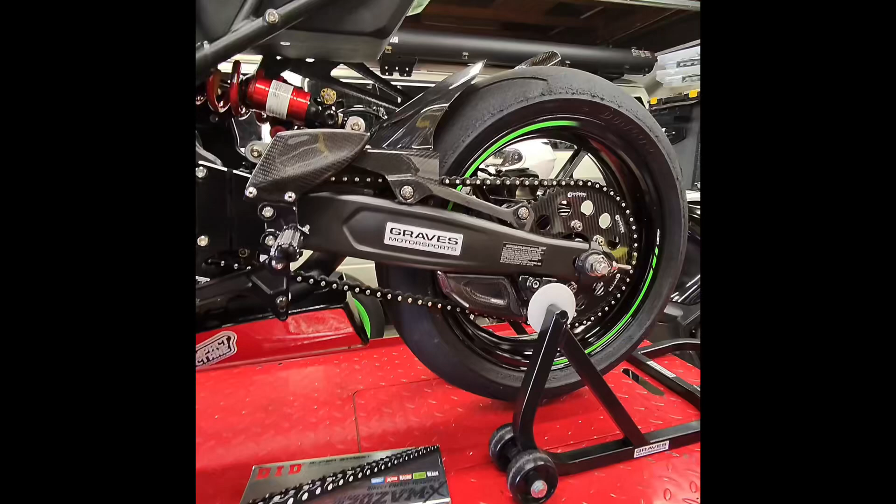I'm going to share my secrets today on chain maintenance for motorcycles. If you are interested in having an expensive chain that lasts a long time and keeps your bike clean, then this is the video for you.

Most folks I see have very dirty chains. They use some wax material that pretty much just attracts more dirt and rocks, and that's not the way. The chains that I use are nice DID, high quality chains, and they last about 20 to 25,000 miles using this method. So stay tuned.

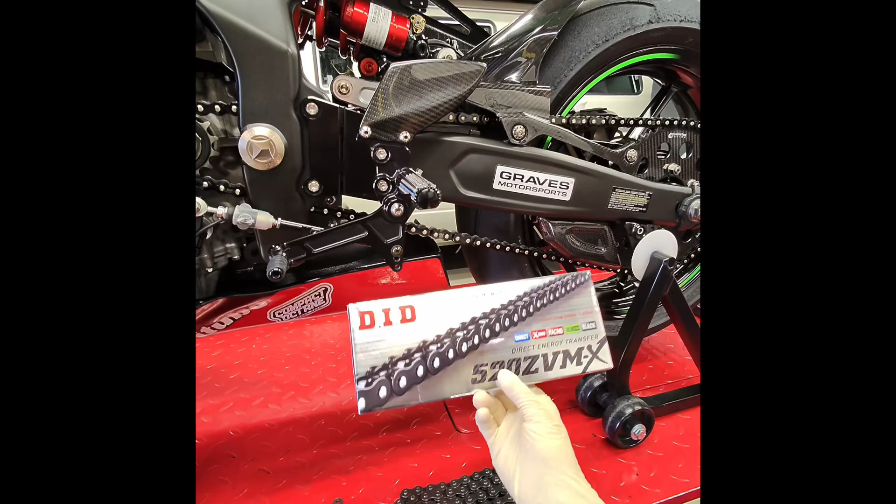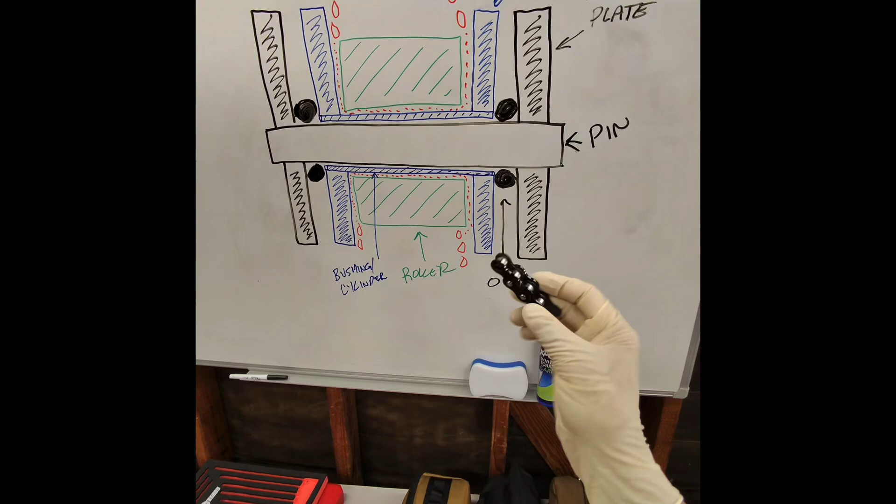First thing we need to do is understand how the chain works. So, we've all seen one. You think you know how it works. It bends, and you just throw some lube on it and that's it. But actually, there's more to the chain than you think.

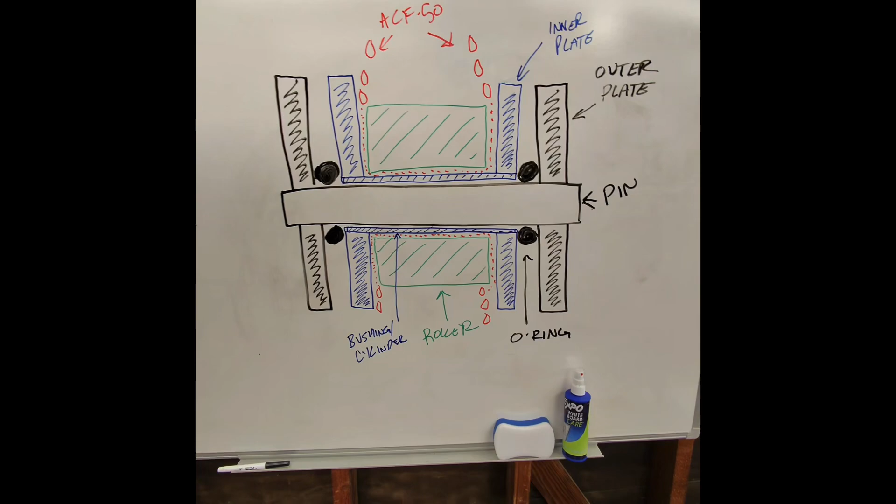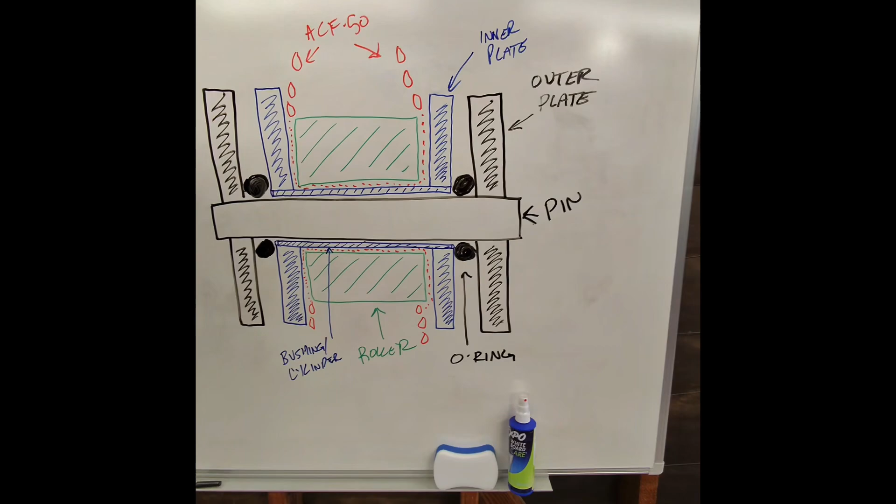There's actually 3 separate moving components in a chain, highlighted in the cross section that's not to scale here, in 3 different colors: black, blue, and green. The red is lubrication, and we'll talk a little bit more about that later. But first, let's go through the different components of the chain so you understand how it works.

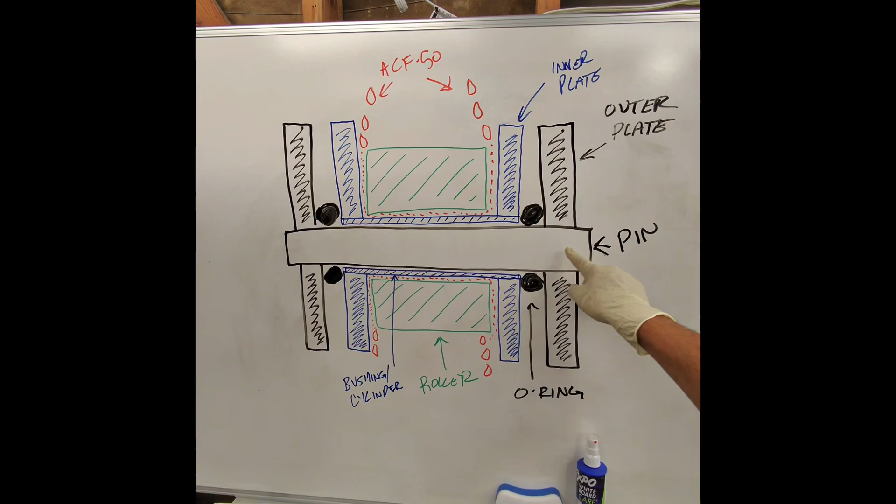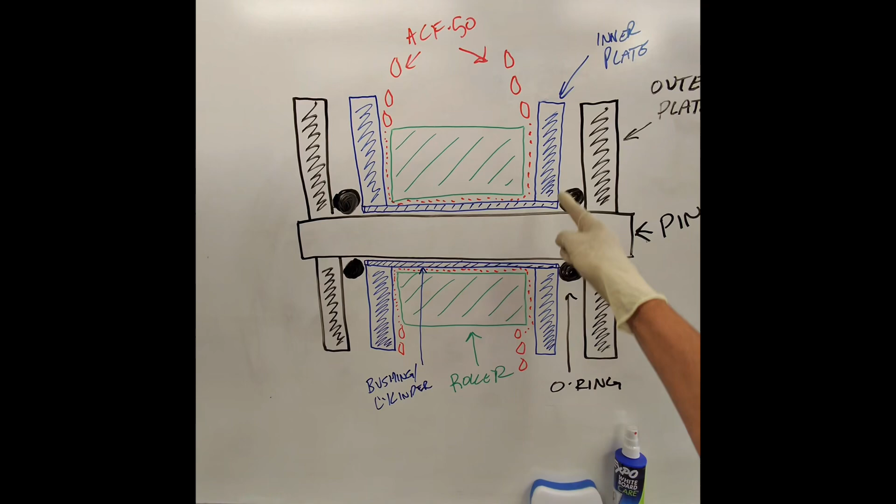Okay, first, let's start with the outer plate and the pin. This is what you see from the outside on the side-on view, right? This is all one unit. The outer plates and the pin are all pressed together and they move together. Then, on the inside of that, you've got inner plates, and those are held to each other with a little cylindrical bushing. So the outer plates and the inner plates slide and they rotate.

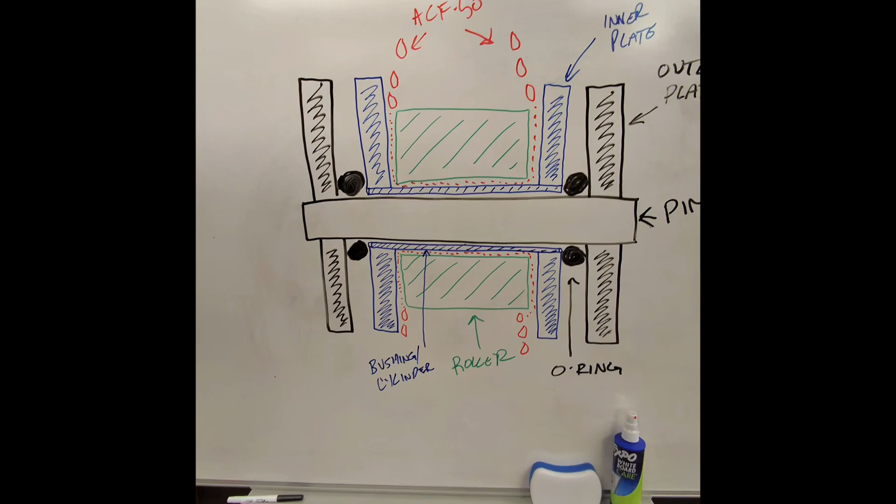The chain can bend, but they're not connected. They're separated by these O-rings, and inside the O-rings there is lubrication, which is permanent. You cannot add more lubrication in there. There's no way to spray something from the outside and get it in between this pin and the bushing or past these plates and the O-ring. That goose is cooked. So that's going to be really important for what we talk about in a minute here.

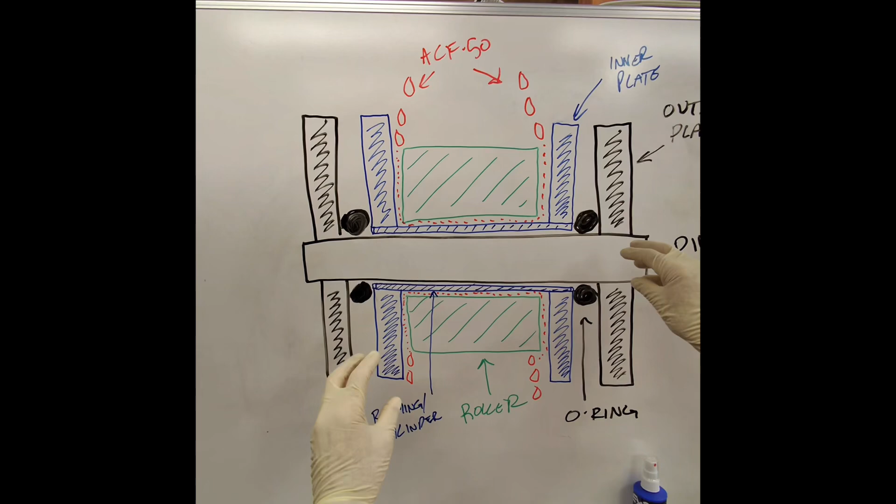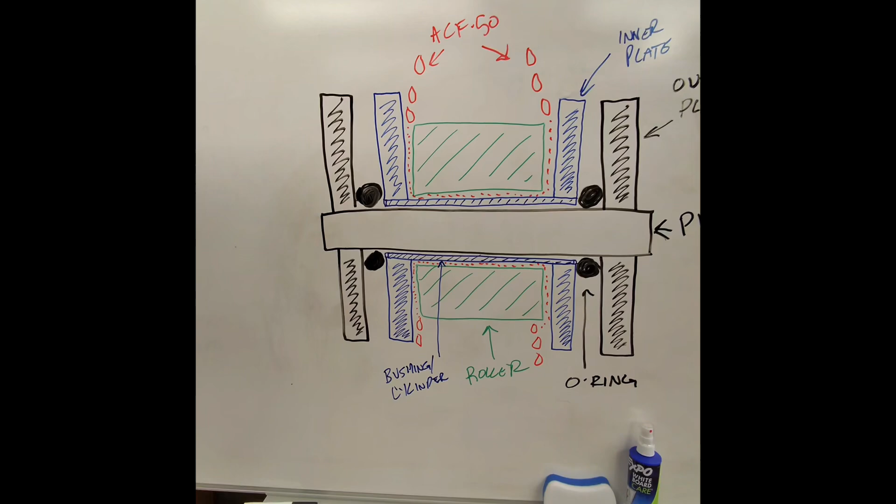All right, so now that we've got the outer plate and the inner plates, those 2 pieces that move, you've got one more, this green roller. This is in between the inner plate and rides on top of the bushing. So these 3 separate pieces move independently, and your sprocket engages the inner plates and this roller.

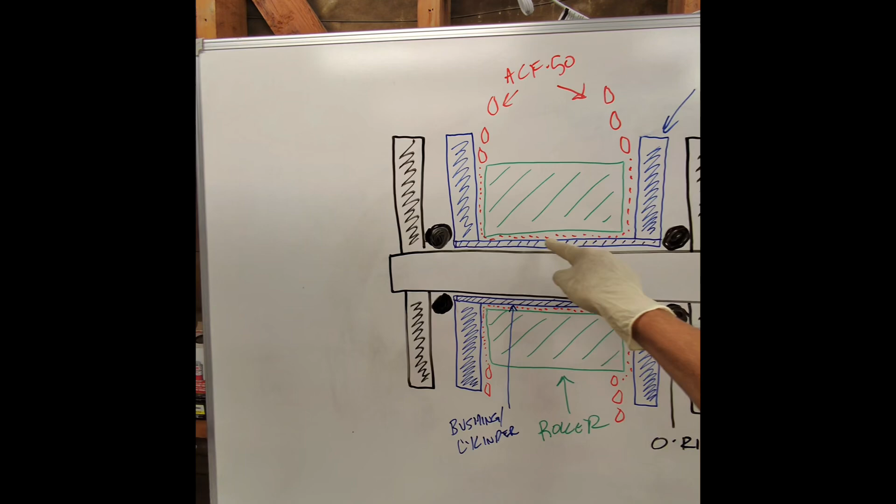And when it does, this roller will spin on the bushing and inside the inner plates, and this is where you need the lube. So any lube outside of this area where the roller and the inner plate contact is just a waste. It's not doing anything. It's just attracting more dirt.

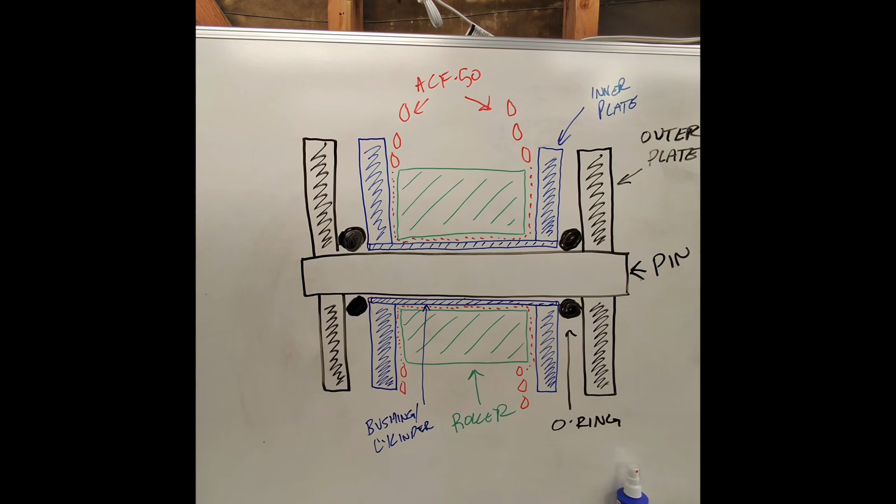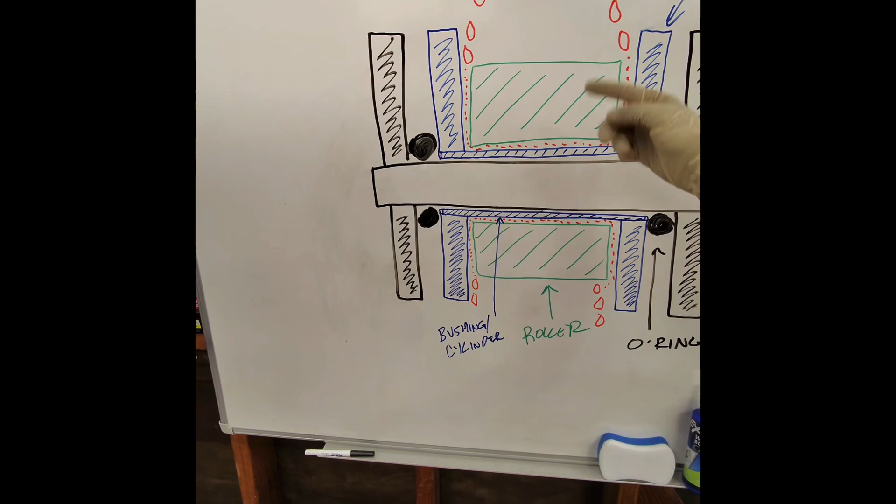So the only way to get lube in here is at the junction of the roller and the inner plate. Put a little lube and it's got to seep and go inside. And you want to do it on the top and bottom. It has to go all the way around the chain. This is just a cross section. Any other lube on the outside is just making a mess.

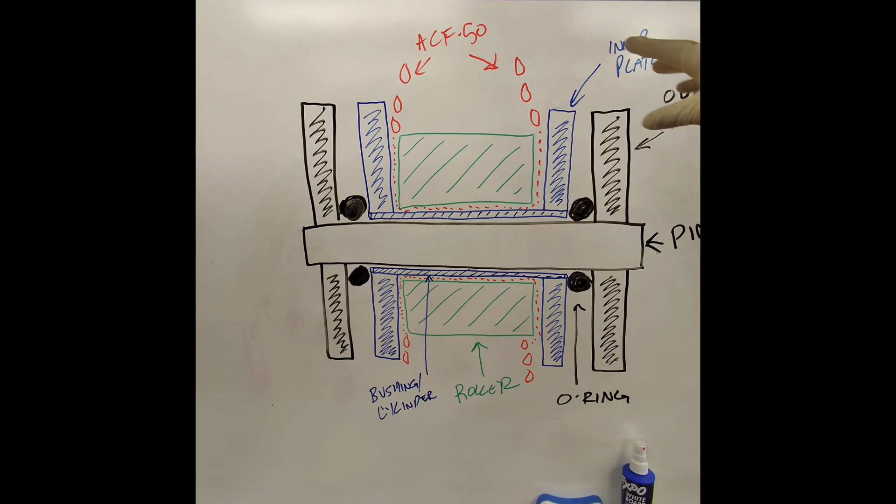So no matter what you do, covering your chain, when you spray it, 90% of it's going to go all over the chain. Very little of it is going to hit this roller and go into this little gap. So instead, my method is going to show you how to get lube exactly where it needs to go.

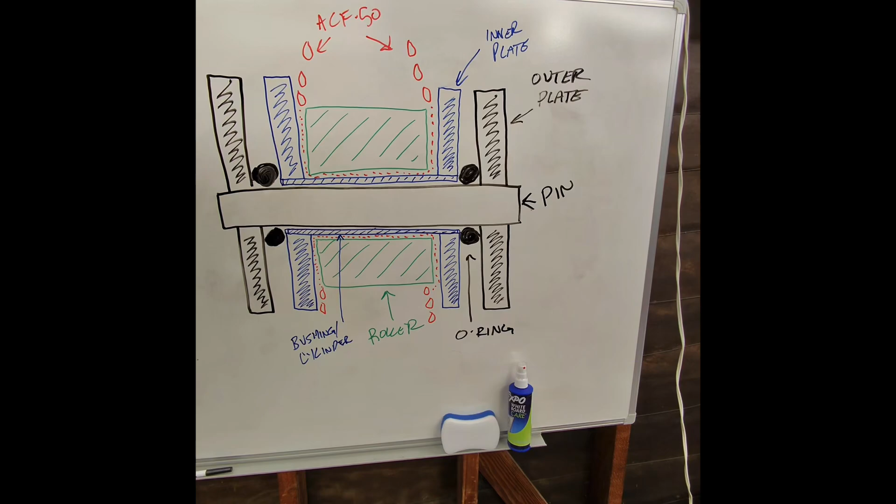The first step is you got to clean all the crap off your chain. This is a chain that's about 7,000 miles used, and you can see it's got no rust. It's perfectly clean. And the way I do that is I use a chain cleaner, like this Motul chain clean. And sometimes I use a little scrub brush to get it all in there.

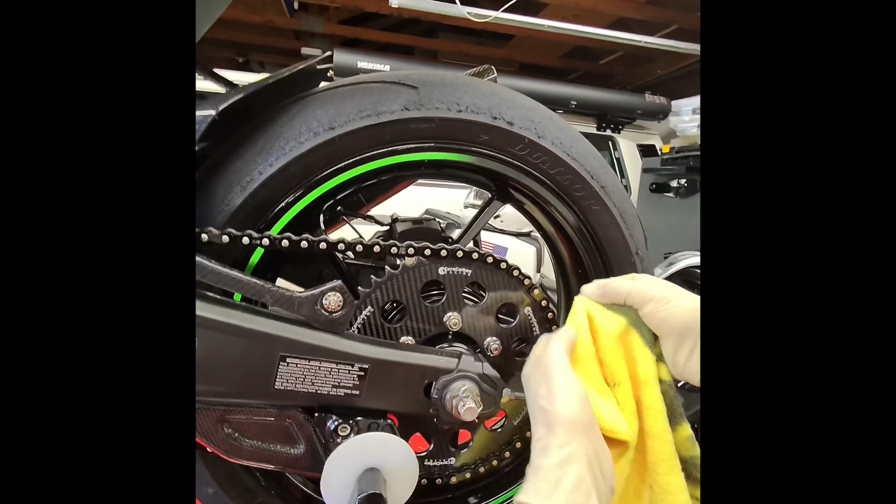But really, you got to use a microfiber towel. With a microfiber towel, you get in there, I actually will floss each and every joint to get every little bit of dirt and grime out. Yeah, it takes about 5 minutes, but you do both sides of your chain and you just floss every little thing, get each roller.

Keep going until your microfiber towel is clean. And then the chain is dry and there's nothing on it. This is the first step. If you don't get here, none of the rest will work. So eventually you're going to have a chain that's just clean and dry.

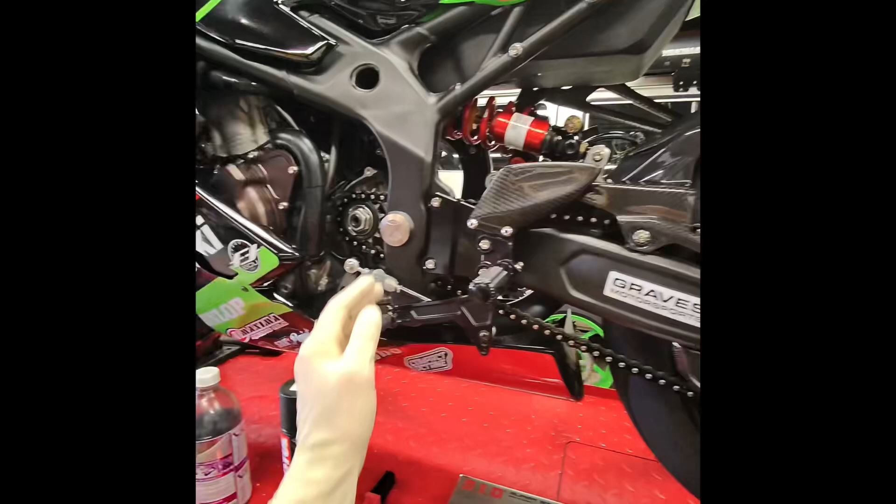You want to clean up your counter shaft area, clean the sprockets. You got to clean behind it and the seals, get everything to where it's spick and span. That is going to be your base foundation for the maintenance regimen that we're going to do.

The tip I'd like to share is I like to mark my chain with this kind of metal marker. I get white. It's called Super Metal Tip. It's like white out, except it sticks on metal. And I use it on my master link. I'll just basically put it inside so that while I'm cleaning the chain, I can very quickly see when I've done the whole chain. So use whatever method you like.

Some people like to put a dot right on the side. You can use different colored master links. Whatever method you choose will work, but you just want some way to keep track of every link so that you start at one end of the chain and finish on the other.

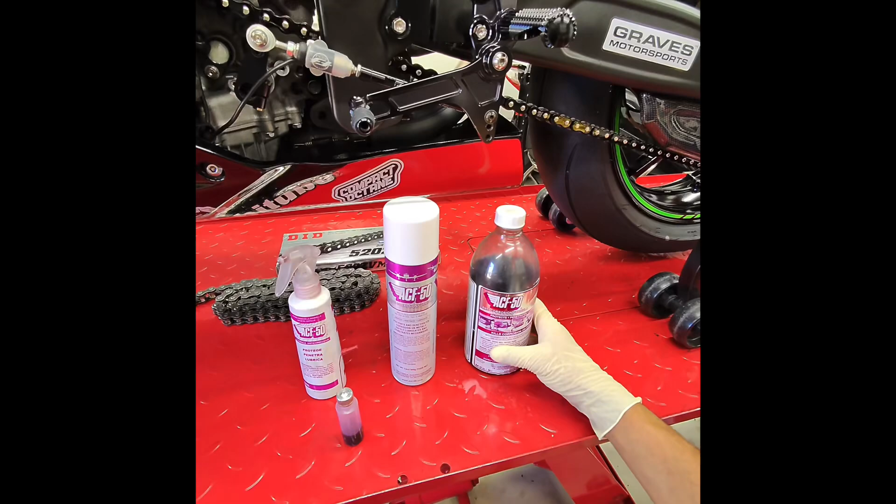Okay, now the main star of the show is this stuff called ACF-50. ACF-50 is a vapor corrosion inhibitor, meaning it chemically penetrates the metal so that it cannot corrode or rust. It kind of provides a barrier. And you wipe it on, and even though you wipe it all the way off, it's still there. And they say it protects for up to 12 months, but I typically do it at least every 6 months.

And on the bikes, I'm doing chain maintenance every 500 miles. You can go longer, but 500 miles seems to be about the happy spot. You can buy ACF-50 in a variety of packages. They've got the aerosol, which is convenient, but it wastes a lot. And then you got the squirt bottle, and you can buy it in bulk as well.

I buy a little plastic bottle with a syringe, bend the syringe, and then it allows me to drop drops into each one of these little nooks and crannies that we talked about earlier.

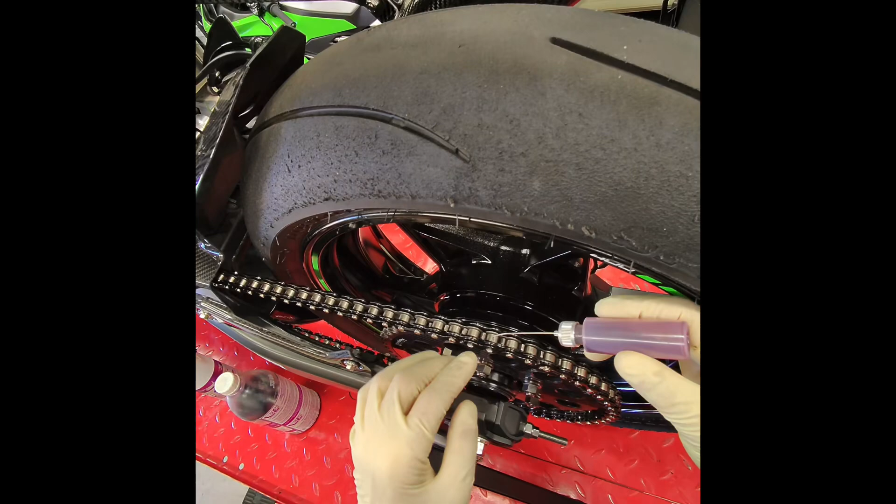I did have to bend the syringe a little bit just to make it more ergonomic. Okay, I've got the bike on a rear stand, which lets me rotate it, and then here's what you do. You take the ACF-50 and you're dropping one drop into each edge of the roller. So you just go one drop there, and you just keep repeating. You rotate the chain. This one's got 120 links, so I'll be putting 240 drops.

But the difference is that I am only putting lubrication exactly where it needs it. The rest of the chain does not need superfluous wax or lube. It's not going to do anything. It's not touching anything. It's just going to attract dirt and garbage onto your chain and pile it up in here.

So once you finish the whole chain, what you do is you put a little bit of ACF-50 on a rag, and then you can wipe down the whole chain, and that'll keep the outside of it from corroding. So that's it, and you do that every 500 miles, and your chain will last 20 to 25,000 miles, and your bike will stay clean.

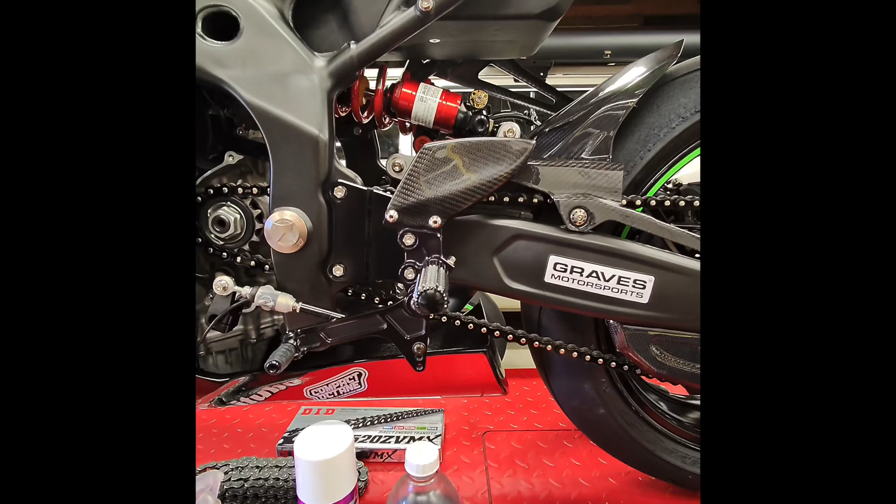Right after you do a lubrication, you're going to ride, and you'll see a little bit of fling. You wipe that off, and then that's it. You're good for 500 miles. And your chain won't look ugly, covered in gross wax. Your counter shaft area is going to stay clean. Your sprockets will last longer. All the rocks and detritus and debris that those chain waxes and other lubes attract and stick onto your chain is actually harmful. So anyway, that's the secret to my chain maintenance.